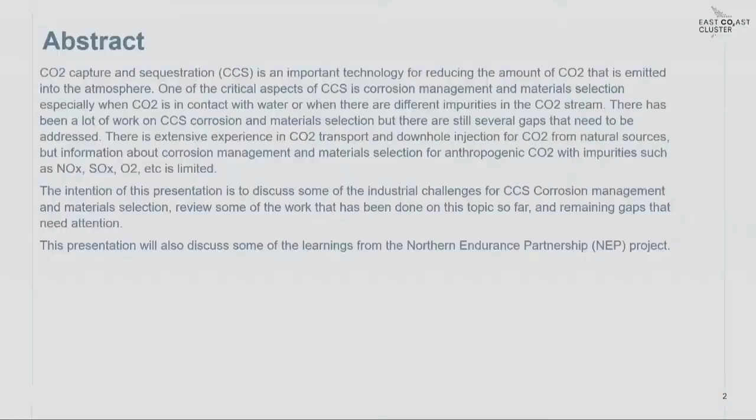So this is the abstract. I think this has been circulated, so I would just crack on with the outlines of my presentation. I want just to introduce you to the East Coast cluster, giving you an overview on what it is. And then I will focus my talk today more on the technical challenges and, of course, more on the corrosion challenges that we face in building up these infrastructures.

I will give you a little bit of highlights of the approach we have used in NEP, Northern Endurance Partnership Project, and I will conclude with some indication of the gaps that are still to be addressed. There are many gaps to be addressed, and I think this needs to be helped by the community altogether.

So this is the East Coast clusters overview in a nutshell. The aims are to remove 50% of the UK total industrial cluster CO2 emissions, create and protect jobs in the Teesside and Humber regions, and establish these two regions as globally competitive climate-friendly hubs for industry and innovations. It's a mix of different low carbon projects, industrial carbon capture, low carbon hydrogen projects, negative emission power and power with carbon capture.

And as mentioned by John, this has been announced in the UK plan as critical on its path to net zero target. In terms of timeline, in March 2023, the Department of Energy Security and Net Zero, DESNZ, selected the first 3 projects to be progressed in Teesside. And these were Net Zero Teesside Power, H2 Teesside, and Teesside hydrogen CO2 capture. The first commercial operations are expected to start in 2027, so it's not that far.

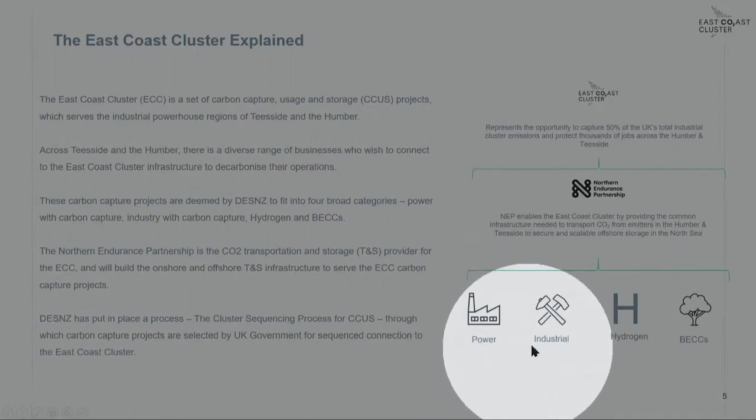Yeah, it works. The East Coast clusters is the whole of this, which is basically at the bottom we have the different projects, which can be categorized in terms of power generation, industrial, so the decarbonization of industries, hydrogen projects, and bioenergy with CCS technology. These projects will be located in the Teesside area and in the Humber area, on the east coast of England.

Then, on top of these projects, we have what we call the Northern Endurance Partnership, which is the core of my topic today. Basically, this is the infrastructure that will be built to collect all the emissions from these different projects, for transportation and eventually to be stored in a reservoir in the North Sea, which is the Endurance Reservoir that has been mentioned earlier. So all of this is the East Coast Cluster. Today I'm going to talk mainly about the NEP project.

Yeah, I think I've covered this point. The last one is the sequencing process, which is basically how the government, DESNZ, is going to review and sanction the different projects to be allowed to use the NEP infrastructure.

Okay, so let's have a closer look at how this is being implemented. This is the Teesside area, and this is a selection of the different projects that are at the moment considering to join the NEP projects. Among all of these, three have been selected, which is the BOC Teesside Hydrogen CO2 Capture, this one. Then we have the NZT Power project and the H2 Teesside project. You see many other projects are in the slides, and they are still under consideration for the second wave of announcement, which will be later this year.

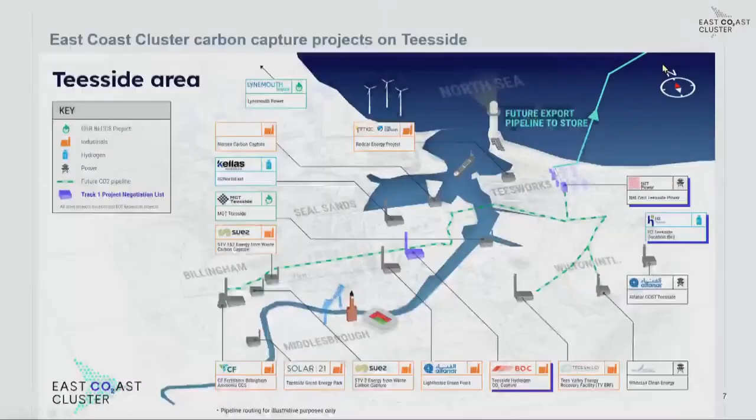And there's something similar in Humber. Basically, we have another bunch of projects that are willing to join the NEP infrastructure, although at this moment in time, DESNZ has not selected projects in Humber, but they will come later. We have another pipeline in Humber, which is again the green dashed line. This is a very different pipeline from Teesside, because this is a much longer pipeline. In Teesside, we have something like 15 kilometers of pipeline. In this case, we're talking about 140 kilometers of pipeline, and it's going to be in dense CO2 and buried in particular. But the approach is the same. So the CO2 is collected at the pumping station, pumped up and sent offshore for injection.

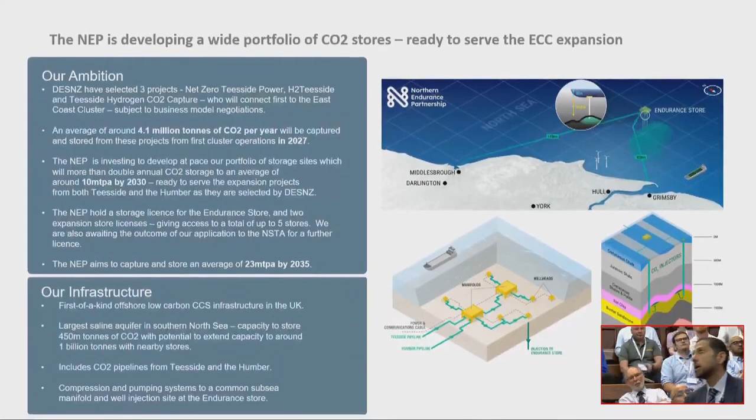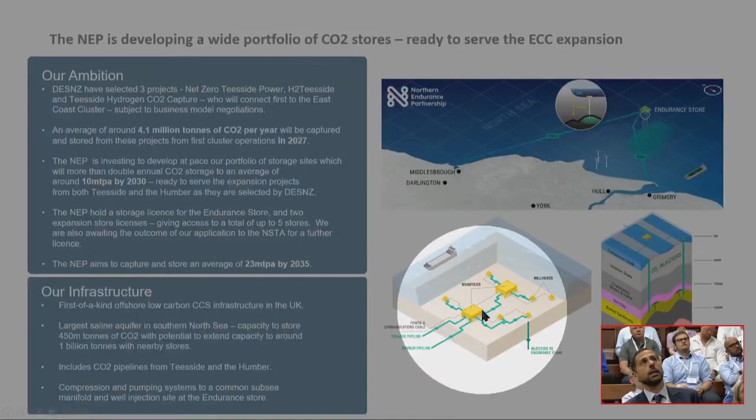We have seen onshore. Offshore, NEP is going to be two pipelines, one from Teesside and one from Humber. Overall, we're talking about 150 km from Teesside and another 100 km from Humber. It's carbon steel pipeline and will process, of course, dense CO2, because in both cases we have dense CO2 that is sent from the two different sites. The CO2 will be collected and injected at the Endurance store, and a highlight on what we have subsea. Basically, we have the two pipelines reaching two manifolds, and 5 wells to start with, plus one extra well, which will be used for monitoring purposes.

In terms of quantity of CO2 injected, stage 1 will aim at injecting 4.1 million tons of CO2 per year, and this will be the first phase, which will be in operation by 2027. By 2030, the aim is to more than double this amount to 10 million tons per annum, and eventually by 2035, this number will go up to 23 million tons per annum. This is a first-of-a-kind offshore low carbon CCS infrastructure, at least in the UK, but even globally. And we have space for injecting CO2 in the aquifer. We have talked about the pipelines and the compression and pumping system to feed these pipelines.

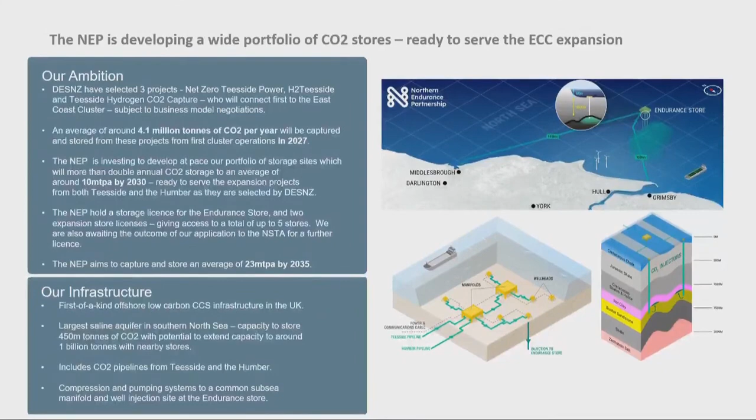Of course, I forgot to switch the timer, so I don't know what I'm doing with time. Okay, I think we are right. Yeah.

Let's get into the technical bit of the presentation, and it's going to be focused on corrosion, of course. And as a general context, we're dealing with CO2, and CO2 itself is not a bad medium for corrosion, because we know that if we deal with dry, pure CO2, essentially it is a non-corrosive medium. And so it's not going to be a problem for carbon steel. The problem is that, as you have seen, we are dealing with industrial CO2, and industrial CO2 will be wet and will be impure from residual species emitted by the different industries, and this will trigger corrosion mechanisms instead.

On this regard, the first step to approach a corrosion-safe transportation of CO2 is actually to define what you can accept in terms of composition. You need to be sure that, for the different species that you can expect from the industries, these species are below a certain amount, so that you're confident that you are not triggering corrosion mechanisms. So this is the first step in how we want to manage the corrosion issue. Of course, this is fine, but not everything.

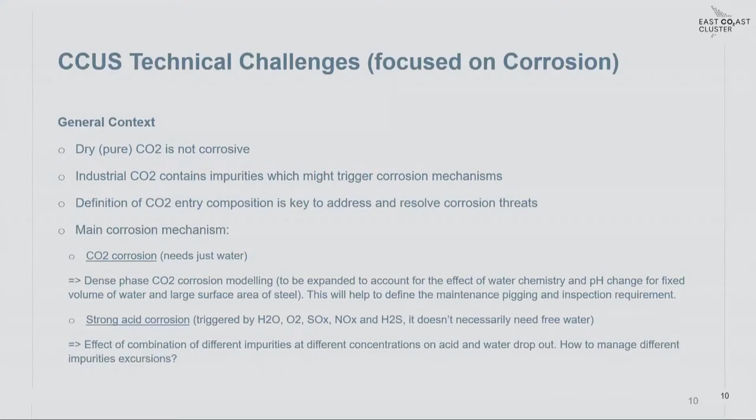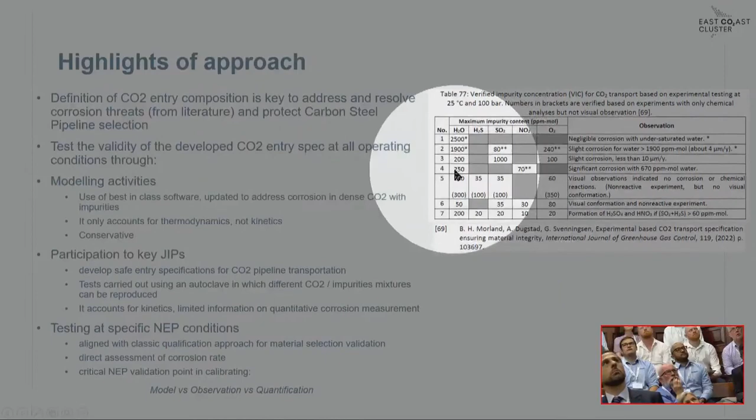What have we done? I told you already that the first step is to define a composition of your CO2 with which you are confident, so that if you are within those limits, corrosion is not an issue. And that's the first step we took, basically. This was mainly done by reviewing the work done over the last decades, since this has been around for a long time. There are many projects out there; this, for example, is the work from Morland, proposing different compositions under which you don't observe corrosive phase formation.

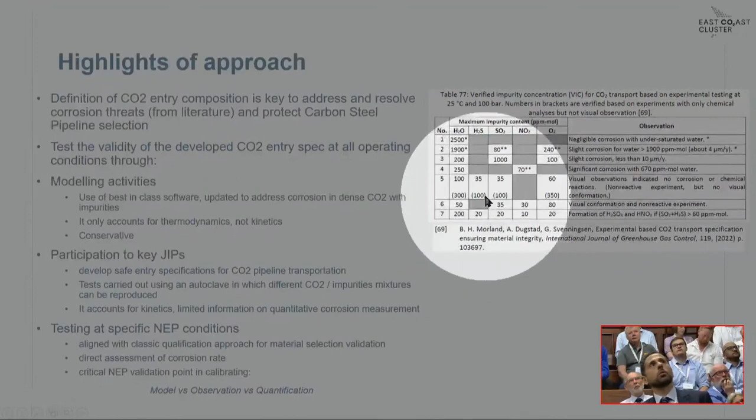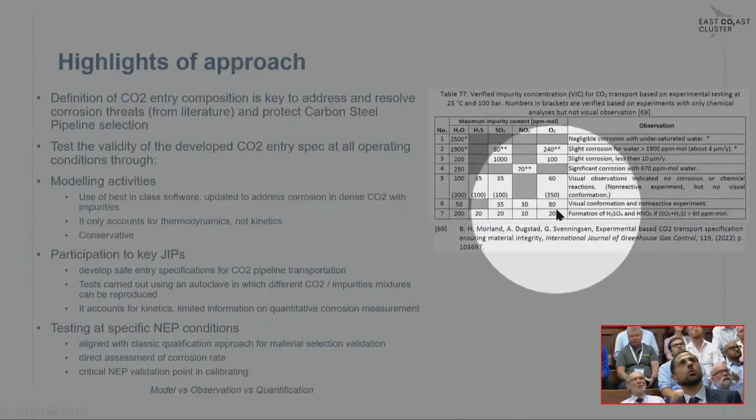Although I'm not able to share today the final composition we have selected for the NEP project, I draw your attention to the numbers of these tables. They are very low. So the challenge here is actually, even if you define an entry spec that is safe, you may need to deal with a monitoring system that must control your oxygen to be below 20 ppm consistently. And this gives you two problems.

One is a limit that can be easily overcome. And the second one, the technology to control this very low amount of impurities continuously is a challenge itself. But let's say that we have defined a safe entry composition. We need to now address two points. One, convince ourselves that indeed it is safe. So we developed it by literature, but we need to test it and convince ourselves that indeed it is safe.

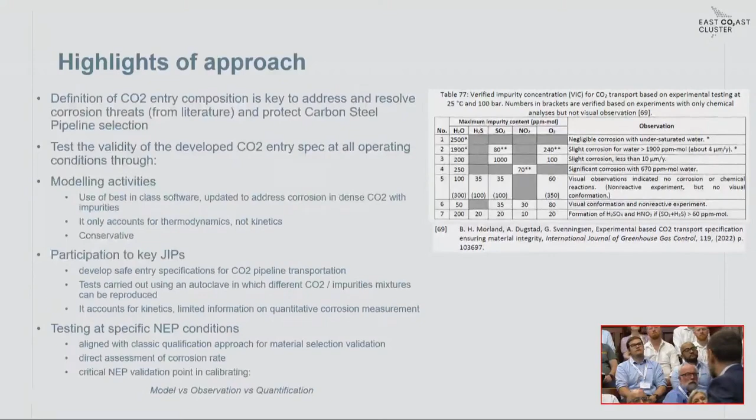And secondly, we need to simulate somehow excursions. So what's going to happen if you have a peak in oxygen? What's going to happen if you have a peak in NOx? And it's a difficult challenge here, because you need to predict what could go wrong in something that has not been done in the past. The main answer to this question is actually that this is not something that you can do with one single activity. You need to approach the problem from different angles and come up with a solution. And in particular, we did three things, basically.

We used modeling. I told you that models are not up to date. However, there are very recent best-in-class models that have been developed, not available to the public domain, but that have been updated to include these reactions among impurities. And we have used it, but of course models will only tell you the thermodynamics of the problem, not the kinetics. So it will tell you that something is predicted to happen, but it might happen very slowly so that you don't have it. And from this point of view, it's going to be conservative by definition, because it will tell you that potentially something could happen, but in reality that might not be happening.

The second point is actually we have participated in several JIPs around the world on CCUS. There are many. It's very much like hydrogen, and CCUS I think is the most JIP topic at the moment. We have selected some of them, and in particular, I will talk about one of them, which is in relation with the work by Morland. And basically, they have developed a device that is reproducing different gas mixtures within an autoclave, in which you can look inside and you can see whether or not a corrosion phase is forming. So we move from modeling to actual real-life visual evidence of whether corrosion is happening.

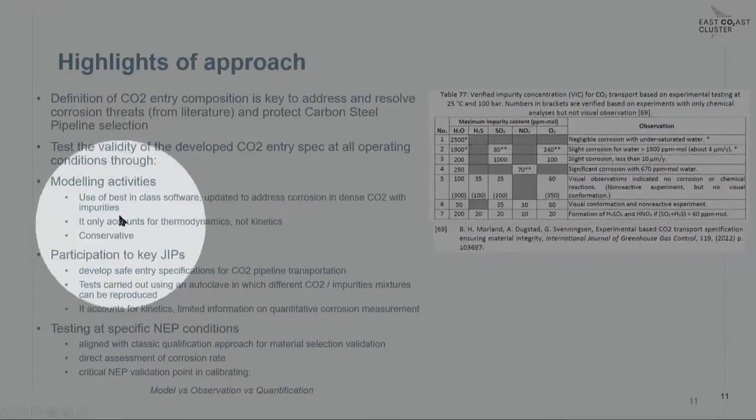But again, you miss one last step, because the first two bullet points are not telling you, if something is happening, how corrosive it will be. So what is the corrosion rate? What is the impact on the material? And this is very condition specific, of course, which is the third bullet point. And it's basically testing in a more classic way at our own NEP conditions. So autoclave testing of metal coupons in this environment generated by the first two activities to see what is the impact on the material.

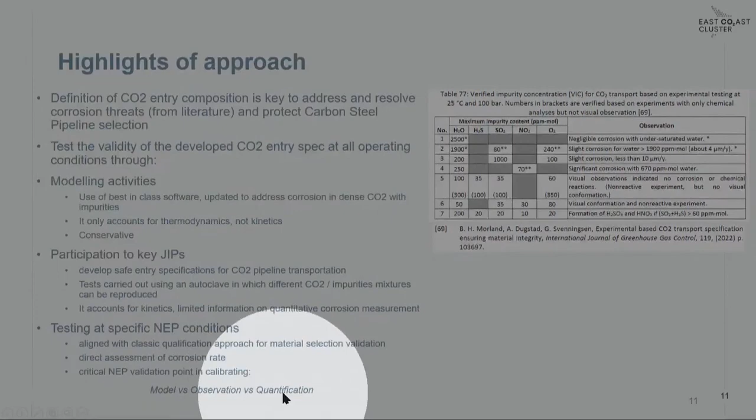In a nutshell, basically we model the problem, we observe the problem, and we quantify the problem. So again, it's a comprehensive way of tackling the topic.

And by how much is a little bit of unknown, and at the moment there is test done. The problem is actually that you have many impurities, so trying to figure out what kind of mix to test can be a very time-consuming testing approach. So that's why we screened at least these different scenarios by modeling.

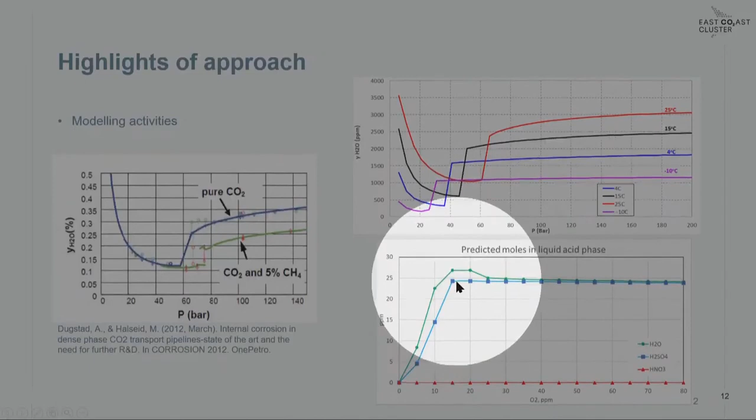Now, theoretically, this could happen. If it happens, there's the next step that you need to take, which is what they have done, for example, in this JIP.

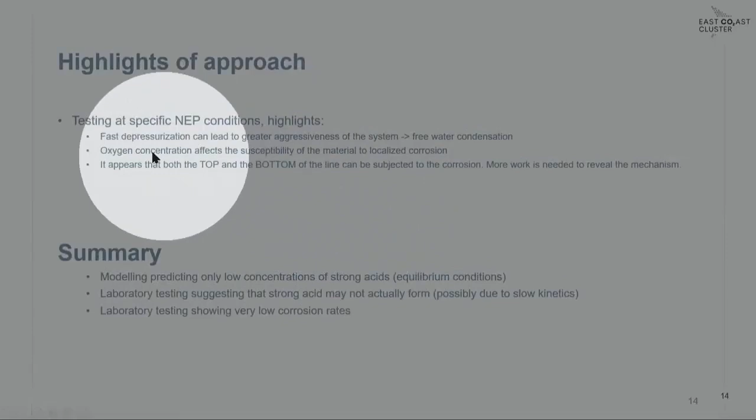And there is a little bit to talk about testing, because of course at this moment in time, testing in a CCUS environment is not really standardized. So everyone is taking different approaches, and this is a problem that I think the community needs to solve. So one of the big gaps to fill is having a consistent way of testing.

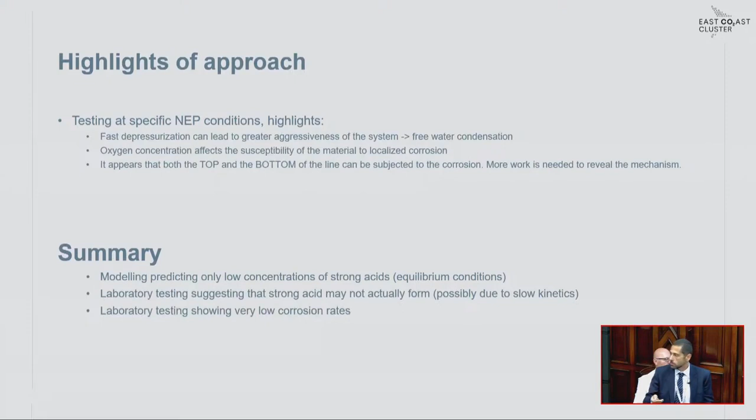But without sharing too many details, we tested, we quantified the corrosion, and we qualified our entry composition by obtaining very low corrosion rates. So even though we had indication from modeling that some acid could form, by the second JIP test and these tests, we demonstrated that this is very low, and the corrosion impact is limited.

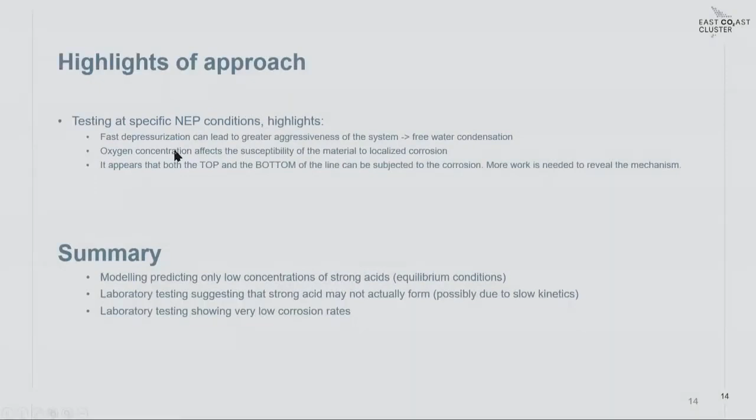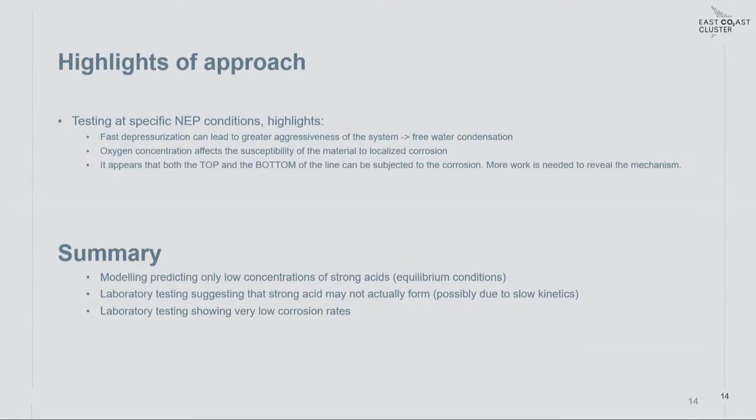There are some observations that you can make. Depressurization can be detrimental in testing, because of the large JT effect, the Joule-Thomson effect, it can bring the temperature very low in your system, and even at very low water concentration, if you go down to -70, -80 degrees Celsius, you can still drop water out of the system, and that can mask your results. Oxygen looks like it is key, so you need to be careful how you manage your oxygen.

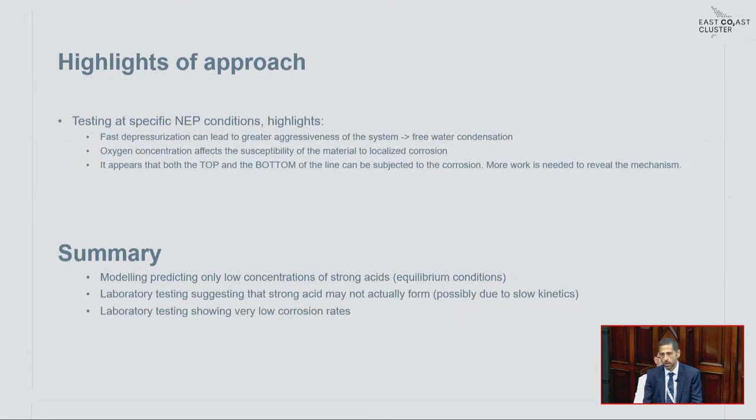And with the tests that we have done, we have noticed that, depending on the conditions, you can initiate corrosion at the bottom of the line or in other positions of your line. It's always said that if you condense a liquid phase, it will accumulate at the bottom of your pipeline, so that's the location where the corrosion will happen. We have evidence that that might not always be the case, although these are very preliminary results that will need to be further investigated.

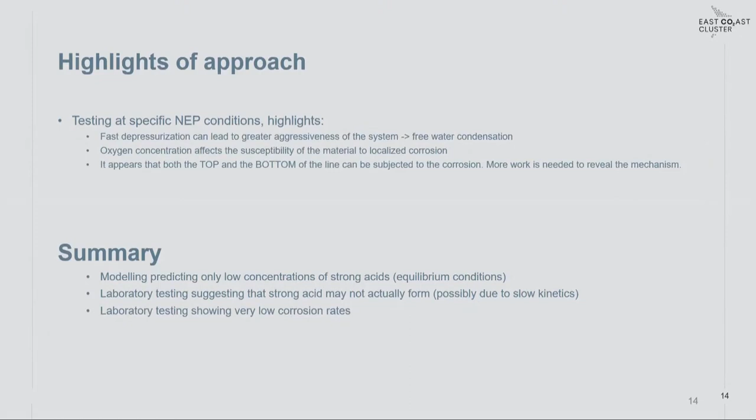In summary, we have developed an entry CO2 spec for our system, the NEP project, which we have proven to be safe from the corrosion point of view, and we have done it through different frameworks, not only one approach.

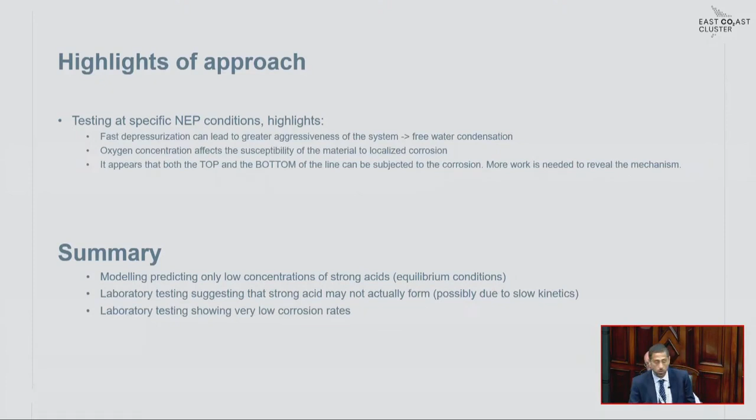Gaps to be addressed. I think the first one is very important: define guidelines for reliable testing. We are not really much into sour service for NEP because of our particular composition, but sour service at very low pH is something that will need to be investigated in the future for other CCUS applications. How CRA and non-metallics perform in CCUS service again is a big area to be further investigated. Inhibition is something that could help, but again, there is a lot of work to be done there to qualify inhibitors for dense CO2.

And not only on corrosion, but also from the materials point of view. In CCUS, you will always need materials that have very good toughness, especially at low temperature, because you can have scenarios where the temperature is low, and you need to ensure that your material is tough even at those conditions.